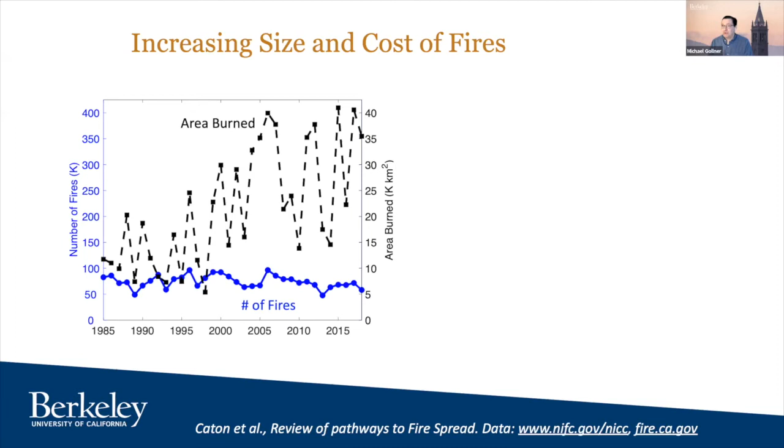The problem that you see is that the number of fires in blue is almost going down or staying steady. Yet at the same time, the area burned is going up. This is caused by 2–3% of the fires, which are blowing up dramatically in size. And that's where a lot of the destruction comes from, is that a small number of fires get very, very large, completely overwhelm resources. And sometimes they grow very quickly, especially at night, and that can cause major safety hazards.

And of course, the suppression costs are going up, but suppression costs are a small fraction compared to destruction and other health costs. California has a history of fire. I was a part of the original WIFIRE project through UCSD. On the left-hand side, you can see this is all the CAL FIRE collected data from 1878 to 2010. Lots of fires. A lot of the state is fire adapted.

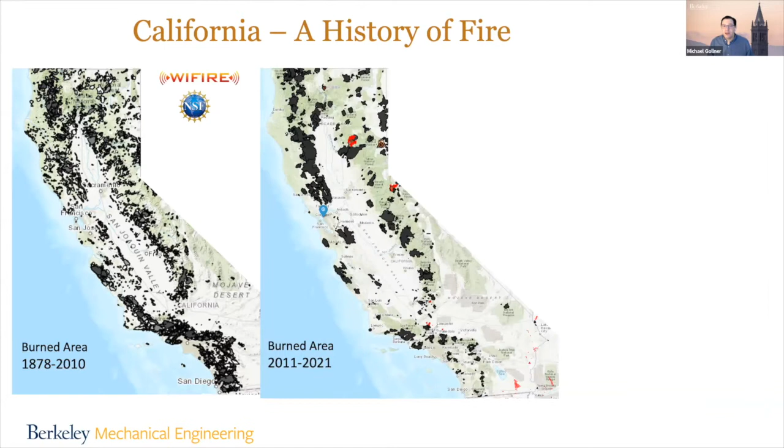It's always had fire. Between 2011 to 2021, if you just look at the scars, you can see something. It's not just so much about the area, but that a lot of those fires on average are much bigger. And it's shifted, where San Diego was sort of the center of things in the early 2000s. Now in the later 2011 to 2021, Northern California has had more and more of these very large fires. Southern California too, but Northern California especially.

And you can see a lot of the losses that have resulted. And it's really these WUI losses, which you can see here, which are just dramatic. The Camp Fire, the NorCal fires, which included the Tubbs, the Nuns, and the Atlas Fire, just the number of structures burned in fires. California is winning that race, unfortunately.

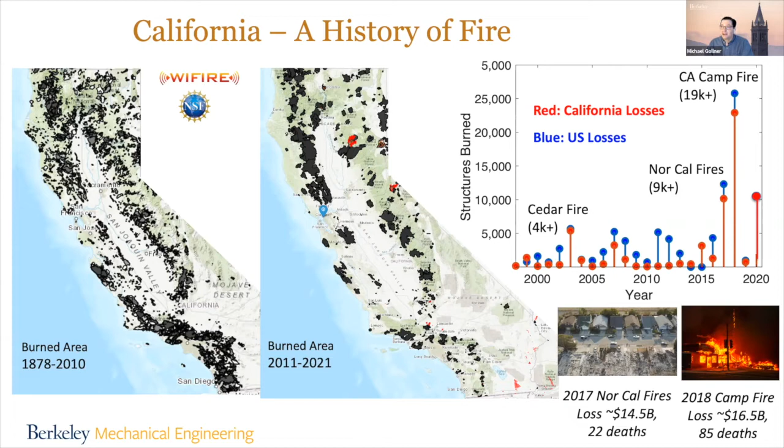This is a nationwide problem, but it's very much concentrated. We just have so much wildland-urban interface and so many people here in California that we're losing a lot of structures. And the costs are in the tens, 20s of billions for some of these fires, and the deaths, of course, most of which occur during evacuations. So it's a huge problem to tackle. And unfortunately, nothing's going to say it's getting better anytime soon.

I like to say that there's three main drivers of change here. The first being climate change, which we know changes weather patterns, and there's more drought, more extreme fire weather. Fire exclusion: we've taken fire off the landscape, so the only time fires burn is the worst case scenario. We've had a lot of suppression, we've removed indigenous fire, and we wait till the worst case scenario when we can't put out small fires. And finally, expanding wildland-urban interface.

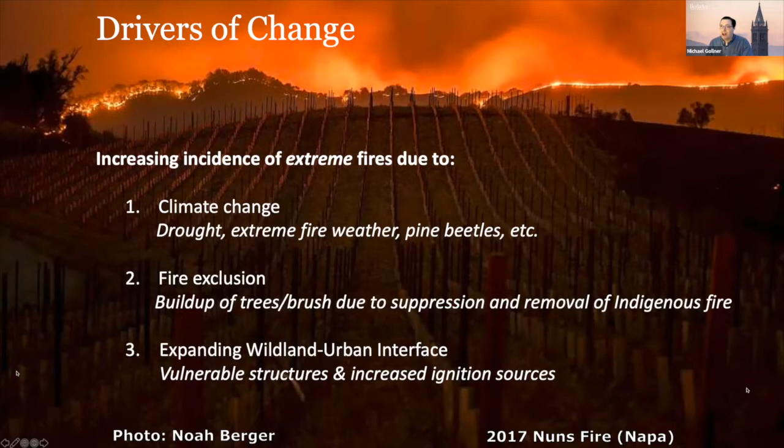A great example is the Tubbs fire. There was the Hanley fire in 1967 or something like that. It exposed some hundreds of homes, and there were only some tens that were lost. But by the Tubbs fire, there were tens of thousands of homes and over 8,000 lost in that fire. So there's that change in time. There's more people, more power lines, more things being affected, as well as ignition sources. So all of these combined together, climate change is probably one of the biggest, because there's just more high fire danger days to cause a problem.

So the talk today was focused on risk, and if we have to talk about risk, we have to talk about modeling. And modeling wildland fire is a challenge in and of itself. There's a couple things up here on the board. Topography, we've known, drives fires. Wind and weather drive fires. Of course, the fuels and the ecology.

But they all combine, and I think we're still struggling just to model fire behavior and to try to make it predictive. Because let's face it, we have trouble modeling weather as it is. Oh, it won't rain today, it rained. Or where's that hurricane track going to go? So we struggle with that side.

And then of course, fuels and ecology. Standard fire behavior models have 40 fuels. We know that there's more than just 40 different types of fuel, that the fuel changes dynamically. There's a lot of poor inputs that come in, not to mention the flame dynamics. We're not even modeling the real physics of the flames. And so all those simplifications combine to give us sometimes decent modeling, sometimes poor.

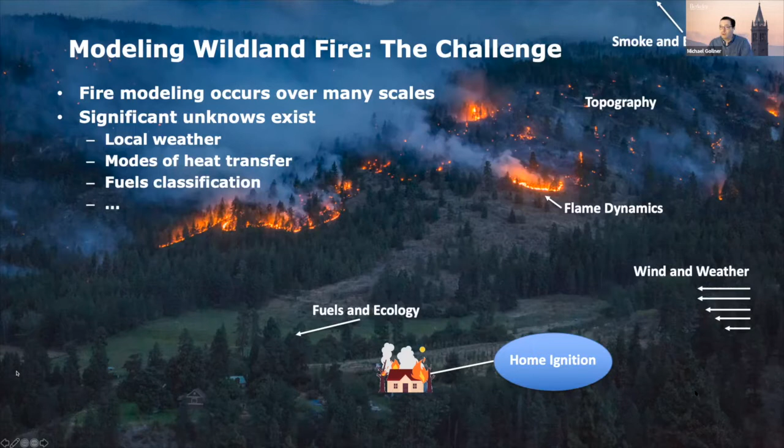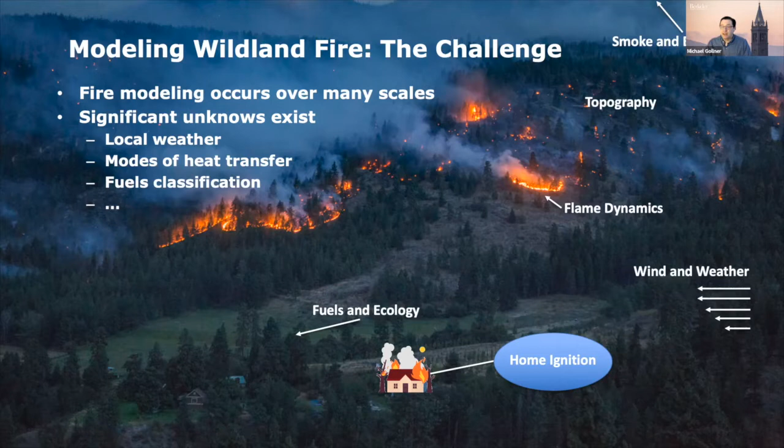It's pretty good to tell us that it's going to go faster upslope and faster with a faster wind speed, but there's still some issues there. And then let's complicate it. What happens when a home starts to ignite? And I'll tell you right now, there's no wildfire model that I'm aware of publicly that can actually move through the Wildland-Urban interface. There are some privately, and the way they do it are really varied, and they're all proprietary, but a lot is based on data, and it'd really be great to have this more open and to start to link these features.

So I want to start, before we move into modeling, why are our communities burning? I think that's been a big question. How could this fire possibly, this is Coffey Park, which is sort of the poster child example of a suburban community that was leveled following the Tubbs fire. That fire, by the way, jumped over a multi-lane freeway and a field before it got to this community.

Well, there's three ways we generally understand for fires to spread through the Wildland-Urban interface. First is radiation. And everyone thought that radiation was the big thing here, right? You have a separation distance, you have a height of flames. But if you actually calculate it, rarely is there a fire large enough to ignite a home from the main fire front. When you just look at the fuels, there are exceptions, and the Camp Fire may have been part of this, where you had very tall torching trees right next to houses. But usually there's a good amount of separation. And that's why we talk about defensible space. Move the fuel away from the structures, and you won't be able to get the radiative intensity needed. You need about 30 kilowatts per meter squared to ignite a panel of wood.

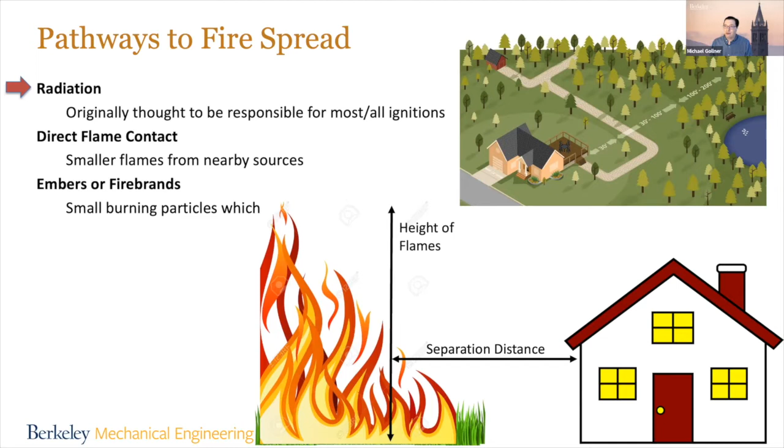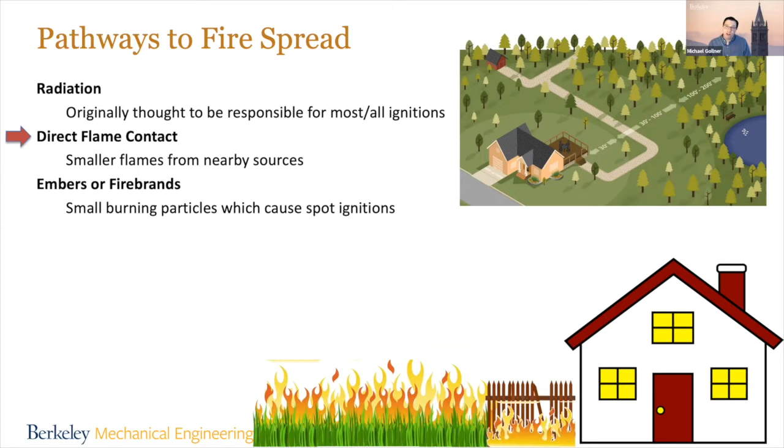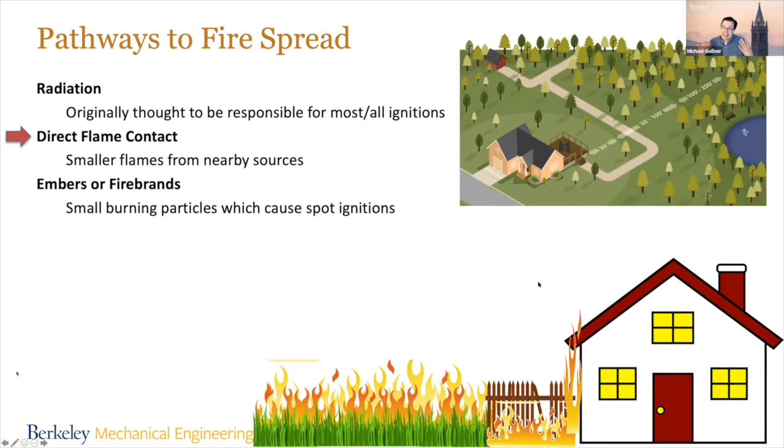Now, there's another way that fires can ignite, which is direct flame contact. And this happens often where a fire maybe moves through a field or grass or shrubs. Maybe it runs along a wooden fence post connected to a house and then ignites a fire. If you have a relatively small fire, but it is directly abutting a home and it's on the physical structure, it's hard for materials to withstand it, especially if you have enough fuel for it to last. So you put a wood pile right at the base of your home, and it gets into the eaves. There's little you can do about that, which is why we talk about the 0 to 5 foot zone, keeping flames and anything that can generate flames away from next to the home.

And then the real kicker is what actually causes most of the ignitions, embers or firebrands. And this is by far the biggest challenge to simulate. Small burning particles, which I've attempted to animate here, which land and then quite annoyingly will ignite a fire, not where you expect and not at the time you expect. It's a very complicated smoldering to flaming transition. And I'll talk a little bit about ignition from it.

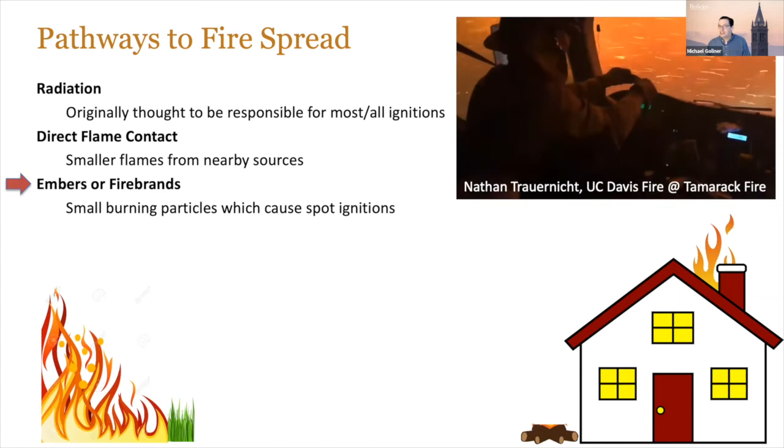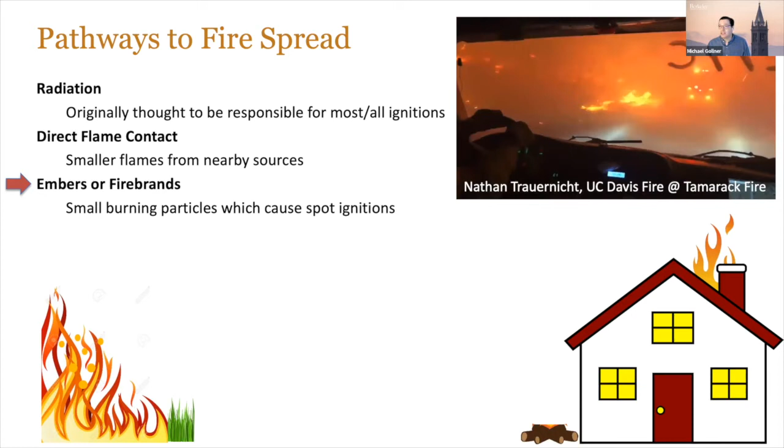But you almost think of it, Jack Cohen always describes it as a blizzard of embers. Maybe that's a little too cold, but you can see this is the UC Davis Fire Department at the Tamarack Fire. Winds are whipping up and embers are blowing everywhere. They can get transported kilometers ahead of the fire. Usually it's a large cluster of them closer to the fire.

But most homes at the Wildland-Urban interface ignite due to small flying embers, not the main fire. Investigations by NIST and IBHS and the UCANR have estimated somewhere between 50 to 80% of the ignitions occur due to embers or indirectly from igniting something in the yard, which ignites the home. And so you can see on the bottom right, it's a great example. The roof of the structure is on fire and nothing around it is really on fire.

It was not the main fire front. It was clearly an ember ignition on a roof that otherwise shouldn't have ignited. So how does it go from being a WUI fire to being a disaster? This is adapted from Calkin et al., and really it's from Jack Cohen's description.

What's that transition when we're igniting homes to making it level a community? Well, we have severe wildfire conditions, so high winds, dry fuels. These are key conditions for a fire to escape initial attack. So when we go to put out the fire, it doesn't work because it spreads too quickly. Generally, if flames are higher than the height of a 6-foot man, which is where these standards are based, we generally can't fight it by hand.

And if a fire is going to be larger than that, it's going to be very hard for us to put a stop to it any time soon. When you have high enough winds, you'll quickly reach that in 20 minutes or something, and then that fire is going to be too large even for aerial attack. Sometimes we can do a good job, but it's rare on those high fire danger days. It causes extreme fire behavior, which is large flames and high growth rates, and ignites residential fires.

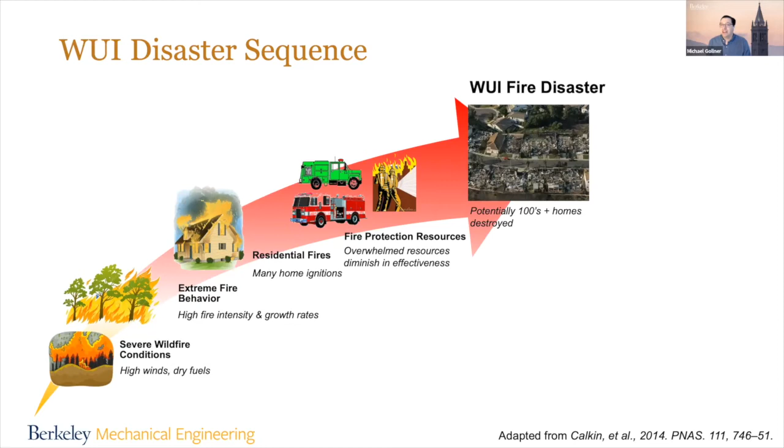NIST studies have shown if there is a fire truck parked at your house, that is the best protection, because there's a small fire and they're going to put the water on it. But embers mean that thousands and thousands of homes are exposed at the same time. And this fire may move like the Camp Fire moved, in a matter of an hour or two, and engulf a town. There simply is not time to move those resources. So we have to do mitigation in advance, or we're going to keep having hundreds or thousands of homes destroyed.

So how do we make a difference? Well, there's a couple ways. We can break this chain by reducing exposure. So instead of having extreme fire behavior, if we better design the community not to be adjacent to an area with extreme fire danger, if we do fuel reduction treatments around, if we do prescribed fires at regular intervals, all of these things can lower that intensity. We don't remove fire, we simply lower the potential intensity that is then going to be imparted on the town.

It's a little different than the earthquake field, where the earthquake's going to happen and we have no control over the jolt. Here, if we design the area around or we manage it properly, which can be its own legal hurdles, then we can actually reduce the exposure. We can't make it zero, but we can reduce it. The second, of course, is to harden our structures. We call hardening making them harder to ignite and harder to spread.

There's Chapter 7A of the California Building Code, NFPA or ICC codes. There are community programs like Firewise, which focus more on defensible space. All of these combined can help make it so that it's not that a structure is unignitable and unburnable, but it makes it less likely that they're going to ignite and burn. And finally, we can improve response. As much as I say we have to focus on mitigation before, preparing the response is still important.

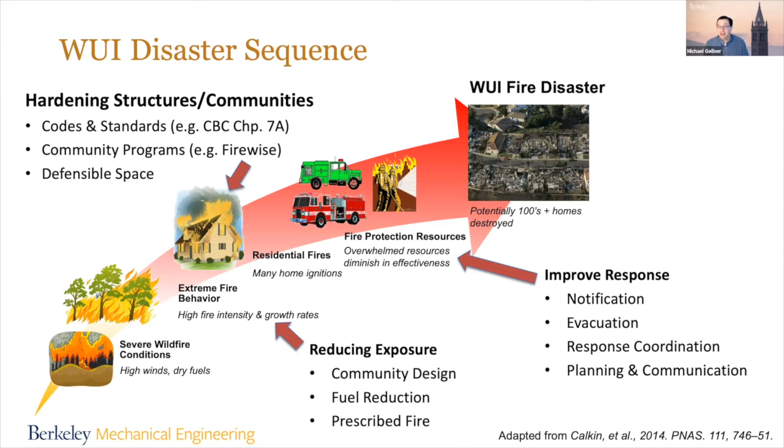So I'm going to focus on two things. I'll talk about the risk and modeling a little bit, but first I want to talk a little bit about experimentally: what happens when embers actually approach a building and ignite it? This isn't an experiment I did, but colleagues at IBHS, actually a former student there, runs a lot of their wildfire program.

And you can see ignition here of a decking piece in front of a pseudo home. They're lofting these embers and seeing how they accumulate and then ignite that decking piece. So we've taken that scale way down and have a very small laboratory scale apparatus. And why do we do this? Because those experiments are great, but we never actually see exactly how those little embers land on a material and actually ignite.

And so we've done 3 or 4 different studies, mostly funded by NIST, looking at how different types of embers accumulate and then ignite materials, and what kind of heat fluxes do they provide? How long does it take to ignite? That is key to us designing a proper protection scheme, and eventually we'll need to put this into our WUI models. I want to recognize Hamed and Raquel, the graduate students who worked on this.

Most of the experiments use the middle set. We wound up using the same material a lot of other studies have used, which is these wooden dowels you get if you're putting pins in your IKEA furniture. They're very repeatable, and they're great because they're fluted. They get a nice ignition profile and start smoldering. We did do some tests, and I'll talk about the difference between that and some real firebrand materials.

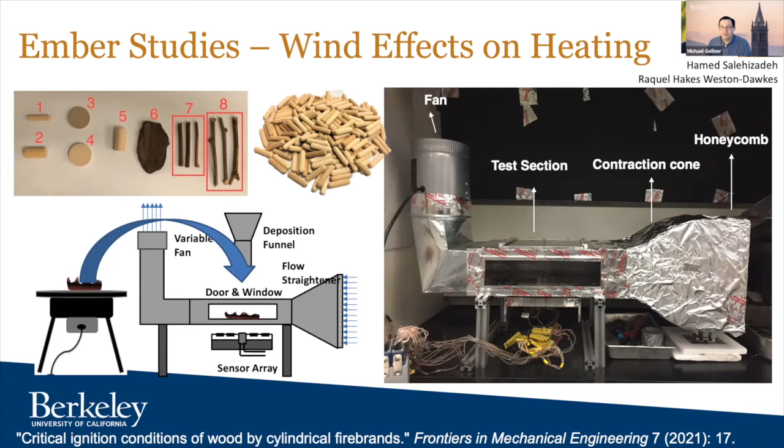The initial studies we did on embers looked at the heat flux we get from this. You can see examples of different smoldering embers. We chose not to use single embers because very few single embers can actually ignite a solid material. They'll ignite a bed of dried pine needles, but not a piece of wood. Instead, there's an accumulation. In a fire, in crevices and cracks, embers will fall and accumulate, just like leaves around a house, and those same areas are going to catch those embers.

Now, the leaves are their own problem if those are ignitable, but as you build up those embers, it's going to change the heating profile. So we chose a fixed amount of deposition of the embers, which you can see on the left, and looked at the heating. As one might expect, as we increase the wind speed, the heat flux goes up. It reaches about 40 kilowatts per meter squared in the center, which is plenty enough to ignite a piece of wood.

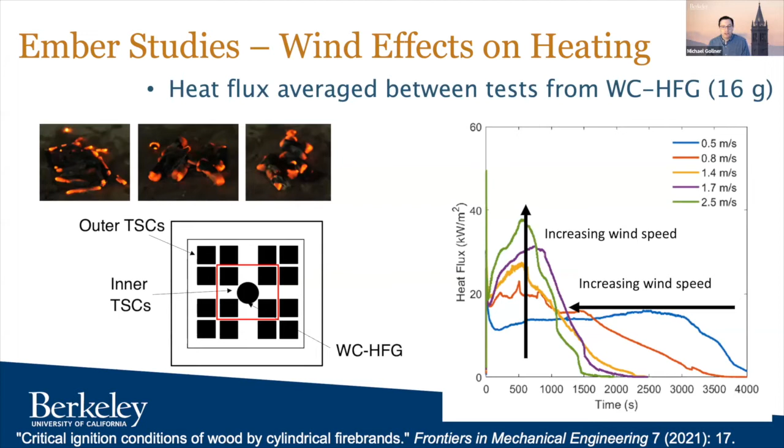The other interesting thing: the more you increase the wind, the shorter the duration of heating. So there's this balance, because as you increase wind speed, you increase the heating, just think of blowing on your coals, but you decrease the time that there's available energy to heat. This isn't a real fire where winds fluctuate and embers deposit at random; we did it all at once. But still, there's going to be a short window over which it tries to ignite a material, and it either works or fails.

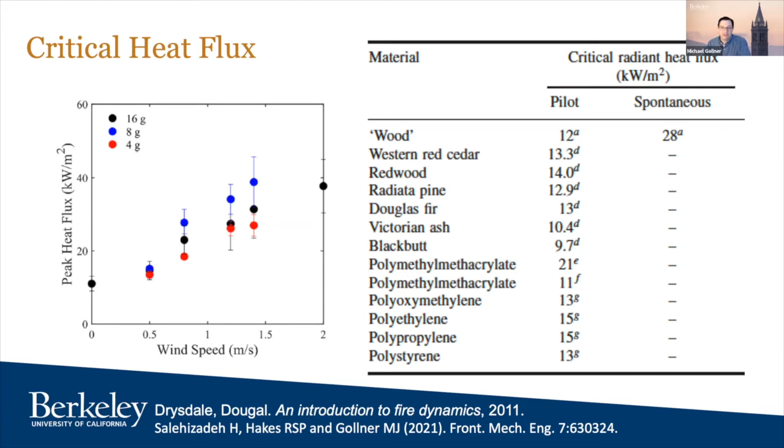Now, this may sound all wonderful, but the reality is changing materials on a home is really difficult. And we're not talking about the main structure and taking wood out from the inside, but even if you have stucco, if you have one exposed wood member on the eave, which is very common, you are now creating an entry point. And this could be an entry point where things accumulate and things can move in. So it only takes one crack, one opening where this can get in and actually cause a fire. So it's actually kind of a challenging problem.

Now, there were some questions after this. What happens with the firebrand material? So the bottom right, you can see we tried different sticks, we tried bark, we tried different shapes. Generally, there are some small differences, but at higher wind speeds, you start to see some small differences. They still generally are on the same order. The sticks produced something closer to the 40 kilowatts per meter squared that we were getting with the pins and dowels. Some of the pins and dowels were actually giving a little bit less in some of these because it was a different size.

But there is a size and shape effect. In this paper, we looked at some correlations with the way in which the pile deposits and how it starts to decay and the shapes. And there are some effects, but it generally is on the same order of what we were doing before. One of the biggest tells, of course, is what's the mass of ember load that's landed? What's the density of the material that it's landing on? Because that plays a huge role in the heat transfer. And finally, what's the wind speed that it's affected by? And we can expect in most of these experiments, this is a super low wind speed compared to what you might see in a wildfire.

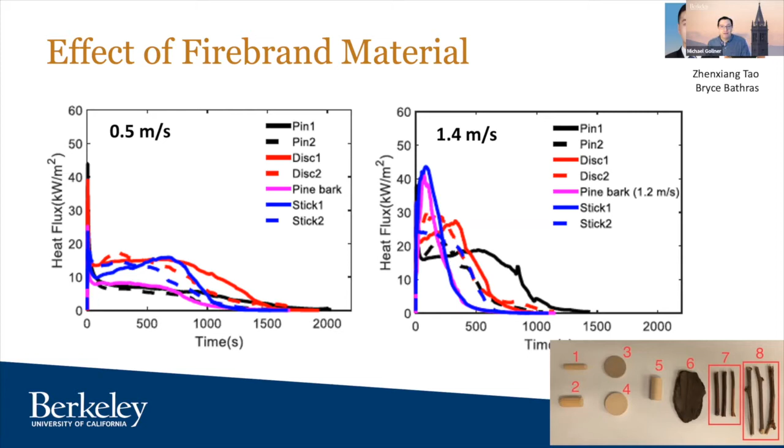We went back to that question as well of what's the difference between that single ember and that pile? And there's a lot of questions because everyone's focused on single ember experiments up until this point. And you can see the heating we got from single embers. This, by the way, is without wind. These spatial sensors didn't work so well with wind. When we did it without wind, you can look, instantaneous average peak heating, the heating from a single ember is incredibly low in comparison to what we get from a pile. And so we can surmise that a single ember is probably heating the material by contact. And yes, if you had a small pine needle that was directly touching something smoldering, we can move the smoldering front and eventually transition to flaming.

However, in the bottom, once we have a pile, 10 grams of embers that are smoldering deposited on top, we can't very well rely on this single ember assumption. We're actually getting heat fluxes with peaks on the order of 28 kilowatts per meter squared, on average 10 to 12 in the center here. It is spatially distributed and it's much higher. I think a lot of this has to do with re-radiation within the pile. It's something that hasn't been fully sorted. It's very hard to put sensors in something that is reacting and glowing and degrading your sensor and heating and cooling your sensor at the same time you're trying to measure. And so that's still something we're trying to do, is to tease out the different mechanisms.

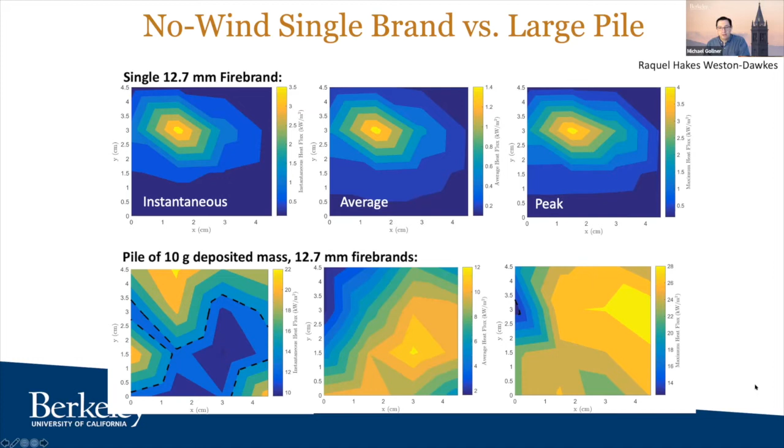The final measurement that we wanted to show here is related to ignition and heat flux in a crevice. All of the previous results were on a flat piece of wood, but I think many of us know that most of the ignitions in a wildfire aren't occurring on a flat piece. They're occurring in crevices, in decking boards, in little nooks and crannies in our wood roofs.

So what we've done is look at pressure treated wood and redwood, two common materials used in decking. We use a standard spacing used for decking, on the order of a centimeter. And we looked at these igniting with different wind speeds and at different angles with the wind. What happens if the wind is blowing right through the crevice at 0 degrees versus across and over?

We did all these experiments not only on the wood, but also with a sensor suite to try to look at the heat fluxes, and then we can compare that to the flat data we have. I don't think we can get too much from the wood. Basically, whether it's pressure treated or redwood, if you crank the heating up high enough, you will smolder and eventually transition to flaming. Redwood is generally considered a fairly fire resistant material, but if you give enough embers and enough wind, it definitely will ignite.

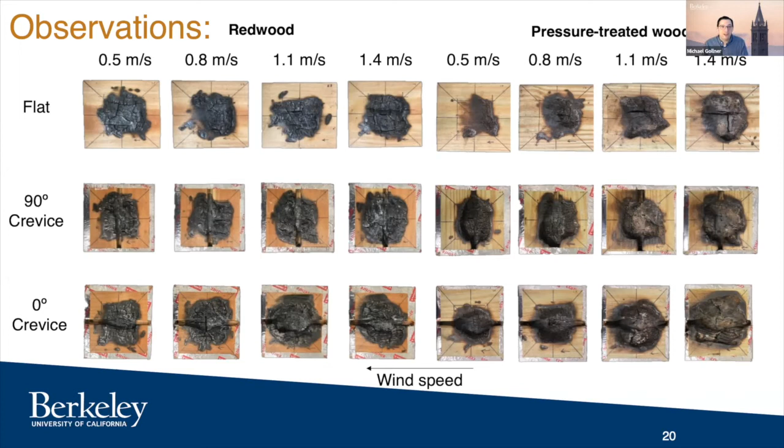Ignition in the crevice, though, is a lot more than that. It was really fascinating to see when we tried to measure the heat fluxes inside that crevice. On the left, 0 degrees means that the wind is flowing straight through the crevice and aligned with it. On the top right, I'll show you one that's about 30 degrees, at an angle to show the biggest difference. And on the bottom right, this is flat with no crevice.

With no crevice, at the particular conditions we did, we only moved up to 1.4 meters per second. We didn't go to the higher wind speeds that we did in earlier studies, and I'll talk about why in a moment. It only reached about 20 kilowatts per meter squared. Well, at 30 degrees, we're getting near 40 kilowatts per meter squared, which is a substantial jump in heating.

However, if we align the wind directly with the crevice, which probably isn't the most common wind situation, we get a dramatic jump to the point that at 1.1 meters per second, we're getting 75 kilowatts per meter squared of heating, which can burst into flaming rather than just starting a smoldering process. So we see a really dramatic shift in a crevice, and it makes sense. The crevice or any of these nooks not only capture the burning material, but also aid in re-radiating the heat and causing it to heat the material more.

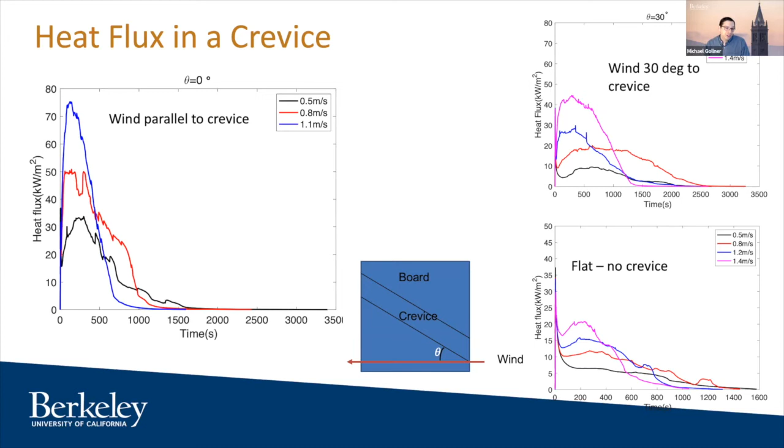With a change in the geometry, we can get 3 times the values and really blow all of our assumptions. So there really is something to looking at how we can try to prevent ignition in crevices and change some of our designs to try to prevent that.

What happens when we have the flames moving is that we have a wildfire model that stops right where this fire did during the Cedar fire. The fire didn't stop there, but at this image, that's where our models end. Once we no longer have vegetative fuel, we can't model into the urban community.

When we think about risk in the community, if anyone's familiar working with wildfire, everyone loves triangles. And so we're going to see a wildfire risk triangle, which has to do with likelihood, intensity, and susceptibility. And the current wildfire hazard and risk analysis considers a landscape scale. We're talking about 30-meter to several kilometer size grids. I mean, the risk analysis was developed for a nationwide analysis of wildfire risk. It was not developed with a community in mind.

And so the work on community risk doesn't really include exposure conditions. And that's something that we've been missing and looking for. So on the bottom, you see there's likelihood, intensity, susceptibility. When we go to community scale, I think the susceptibility is going to be important because we have to understand the exposure conditions. So long-term, we want to develop a WUI spread model, whether that comes out of the earthquake engineering literature, which I know Negar has been working on and others, or something data-driven, or something physically based that's new.

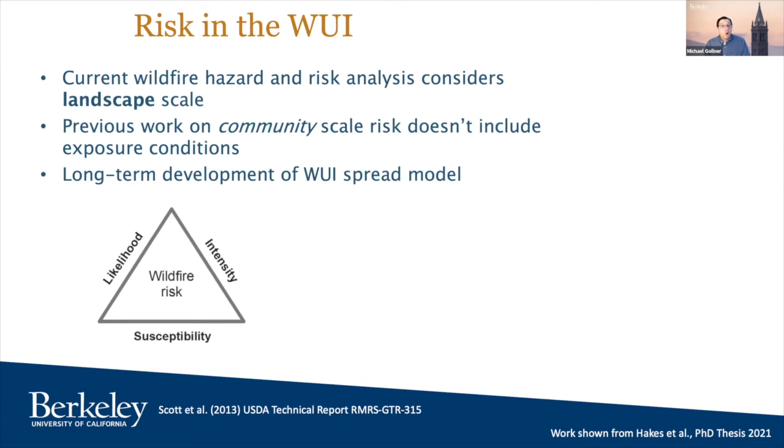So when we're looking at risk in the WUI, we have hazard, the probability of a given exposure level being achieved. And so this comes a lot from previous weather data. What are the likely conditions? As well as for hazard, it's going to be the actual wildfire conditions that can be reached at those conditions, so the fuel models, and the vulnerability. And I'll tell you right now, the problem is vulnerability. What vulnerability do we have for homes? We have very little, if any, susceptibility data of a structure to a given exposure level.

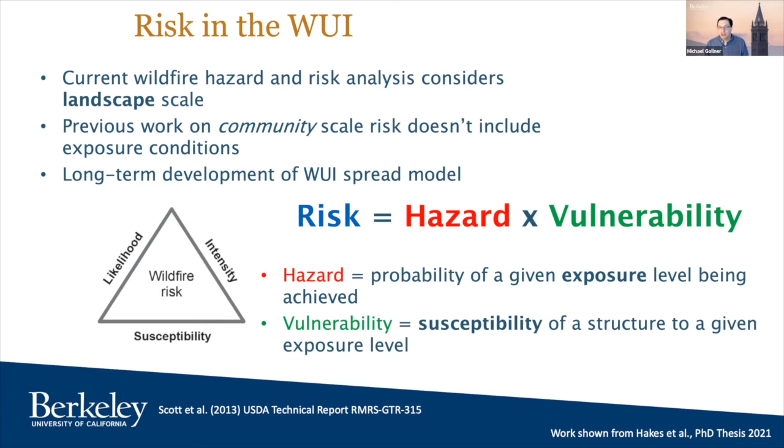So this was the beginning of a project that I'm going to show. It was led by a PhD student, Raquel Hakes. She's now a postdoc at Sandia. She worked in her thesis on a reconstruction model methodology. So we have a great database of structures that have burned in fires. And folks have published papers, Alex Syphard and others, and Jon Keeley, that have looked at, okay, structure burned, what were the fuels nearby, what were the weather conditions? But I'm really interested not just in that, but what was the actual exposure of the fire to that structure prior to it burning, as well as what were the conditions? And no one is there collecting that data.

So we want to fill it in by trying to run those wildfire models of those past fires, match them as best we can, and then pull out things like the flame lengths, the rate of spread, the fireline intensity, and of course, embers. And that's probably one of the hardest parts. So that's the goal of what we've been doing, to try to recreate fires, take the loss data that's been collected by CAL FIRE over the years of all the structures that have burned, fill that in with the structures that didn't burn, which they weren't collecting, and then do an analysis and see what factors are actually important, and can we look at this in a data-driven sense of modeling fire spread in the future.

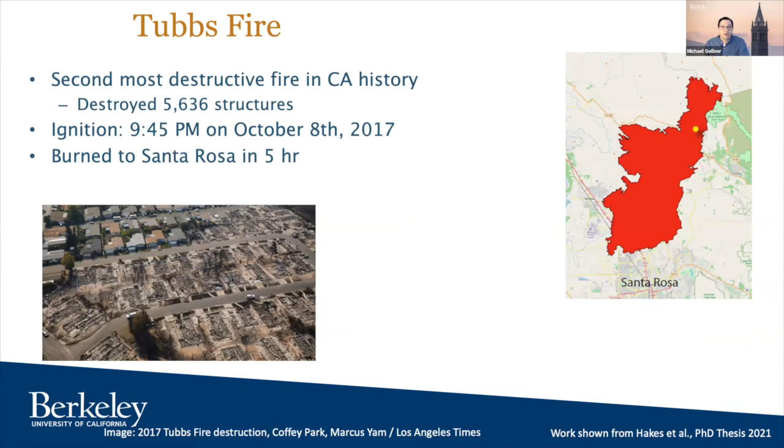So this is the Tubbs fire. It was the second most destructive fire in California history. It's maybe dropped down the list a little bit, but it destroyed 5,600 structures. There are more outbuildings as well. The Nuns and the Atlas fire were also going on during this time, but you can see how it burned through the Coffey Park community and really went through suburban, but it also started up in the hills and went through a rural community. So it's a nice fire. It was very fast. In 5 hours, it burned to Santa Rosa. Unfortunately, we have very little information about the fire as it went, but we know the final fire lines and we know everything it destroyed. And it destroyed both rural and suburban, so that gives us a nice starting point.

So for the validation, we ran these models in a model called ELMFIRE. It's very similar to FARSITE, which is the current landscape scale model of choice by the Forest Service. ELMFIRE uses the same Rothermel type, which is a 1D correlation for flame spread that FARSITE and FlamMap and every other US model uses. The difference really is the way it was developed by Chris Lautenberger, who's now at Reax Engineering. He's a Berkeley alum, and basically it treats every fire run probabilistically from the beginning in a level set context. This helps us in the analysis and in terms of developing everything for risk. It also has a better treatment of embers.

It intrinsically has a probabilistic treatment of embers. If you ever dig into FARSITE, FARSITE only lofts a single ember from a cell to another single cell. That's all it can do. And so it's a little bit limited, and it only does maximum lofting. It doesn't do in between. And so that's why we chose to switch to ELMFIRE: it just treated things better when we were looking probabilistically, and it already had some of these ember models and the links to WRF and other models we needed built in.

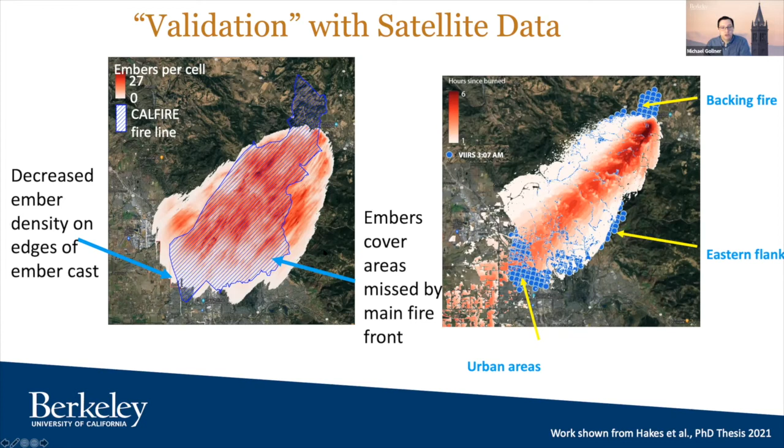And what you can see is that the embers were cast far beyond this fire, and this is probably a relatively realistic ember cast. So there's more embers cast in the center of the fire, but it does move into the urban area. And there's only a small area of the urban that isn't covered with embers, and that's probably because it was a totally suburban fire and it was spreading relatively slow until the winds died down.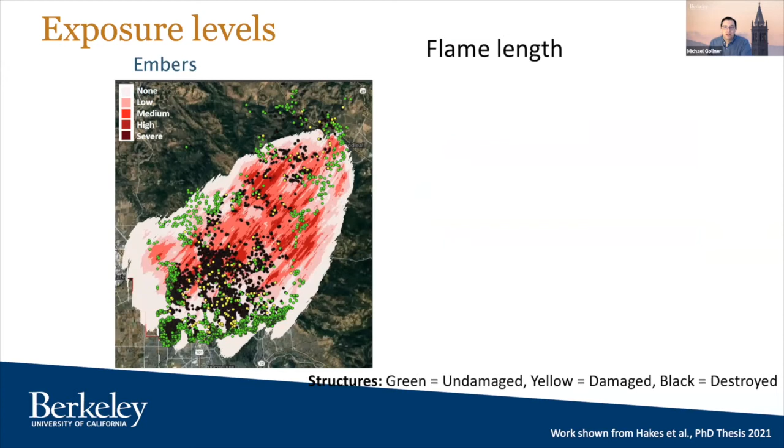So what we try to do now is to link that with the exposure level. So we have both embers and flame length, and on top you can see the fires. We have green undamaged structures, yellow damaged structures, and black destroyed structures. There are very few damaged structures, just the way that they collect it and just the way fires behave.

If there's nobody there and an ember gets in, it might take 10 hours to burn, but that house will burn to the ground. Houses are designed to have a fire crew come and put out the fire. And during an event like this, there's just no one to do that. So only about 10% are damaged. Most of them are completely destroyed or they're unharmed.

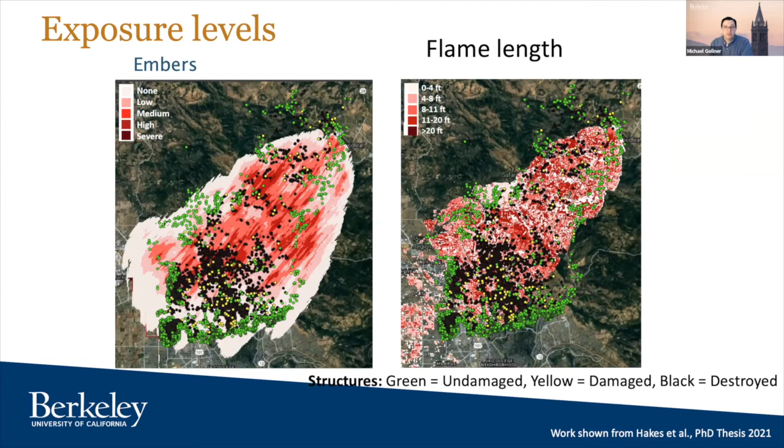So looking at the exposure levels, I mentioned what happens in that urban area, and Coffey Park was sort of the poster child. The flames don't reliably expose the urban areas, and you can see the flame lengths here, but it is actually included in the ember cast. And so most of this area receives, it's actually interesting, a very low level of ember cast. So there's definitely embers that are lofting.

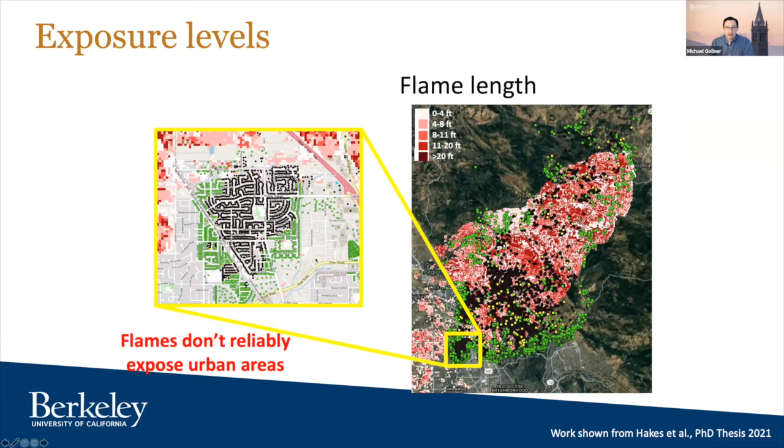Remember, the ember model depends on the distance from the source, the intensity of the fire that's generating, as well as the wind speed and direction. And so it's lofting those embers in this area, but it's at a lower density. But it doesn't take a big density of embers to ignite a fire. So once that fire gets going, it then became an urban conflagration and spread through the area. And we sort of missed some of the ember exposure further down to the left.

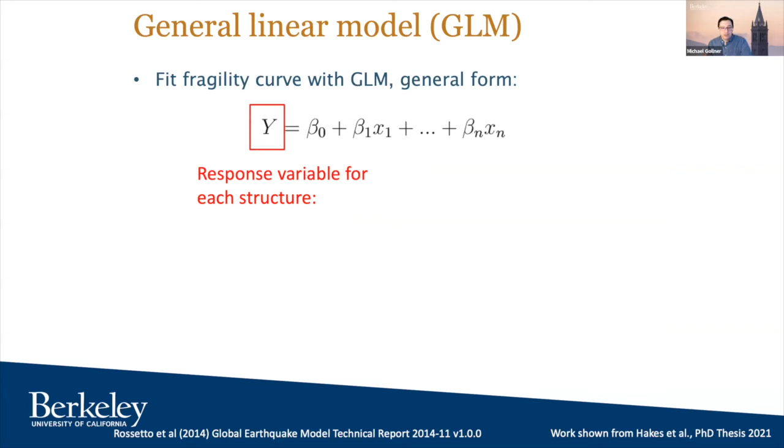So what we try to do is take this sort of fragility curve approach as a first take. So we're fitting the fragility curve with a general model, and we find a response variable for each structure, basically the damage state. So we took basically everything that's undamaged, damaged, or destroyed and go between 0 and 1. We didn't really look at the damaged because damaged structures were so few, and so we just sort of lumped them within destroyed. And that seemed to work better and to simplify the analysis a bit. And it was a small number of structures in comparison to everything else going on.

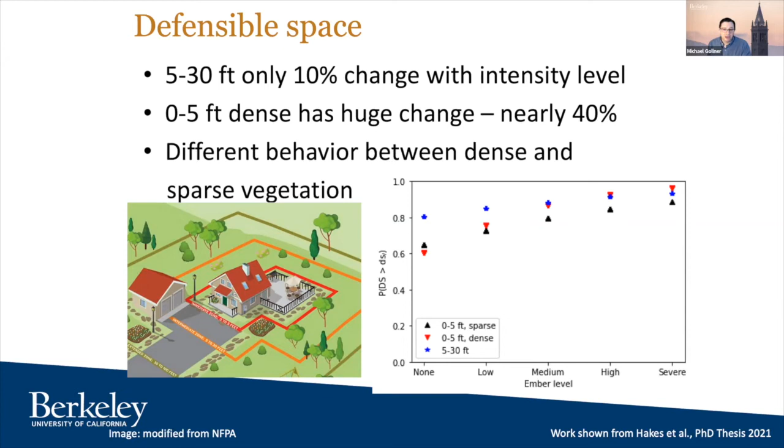You know, just to highlight, it's not just suburban communities. In this case, this is a rural community and the entire lifeblood of the town is gone, much like Paradise was. Although here, reporters were actually in the town while it burned. And so there's really a key need for us to take these communities and make them more resilient to fire.

So I think key takeaways when I'm speaking with engineers is to remember wildfire is a natural ecological process and we're disrupting it. And our goal is not to remove fire, but reduce risk and to make it so that our communities are going to survive. We can lose a few houses, but we don't want to lose lives and we don't want an entire community to burn.

We want to make the community resilient so that a few houses burning isn't going to take down the entire community, which in many cases under extreme fire conditions is the case right now. So as engineers, we're trying to create models and optimize and prioritize decisions. We need quantitative experimentation and understanding of the process.

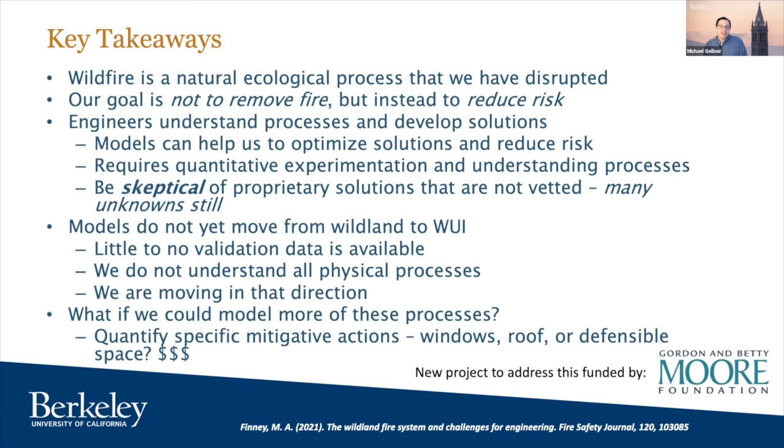This was a question actually from the state legislature: how many homes in the community do you have to protect till it provides sterilizing immunity for that community, which is clearly a pandemic term they're learning about, sterilizing immunity. And I don't think anyone knows. And I think it definitely depends on the exposure. And so it's all sort of a mixed thing.

Now, if you know Charlie Scawthorn, who's up here at Berkeley, he's big in the earthquake field and he has lots of opinions. We want to move to a physical modeling approach, but initial attempts at trying earthquake models with fires have been difficult. And I'd love to hear Negar's opinions because she has a recent paper on this. But building something from scratch, there's a lot of aspects that go into this.

And at least in my expertise in the firebrand models, we don't even have a lot of the numbers to do this accurately. And so I think there's still going to be a lot of data-driven pieces that need to come in to make it work before we can move to a fully physical approach, because we still have a lot of unknowns even in the physical processes.

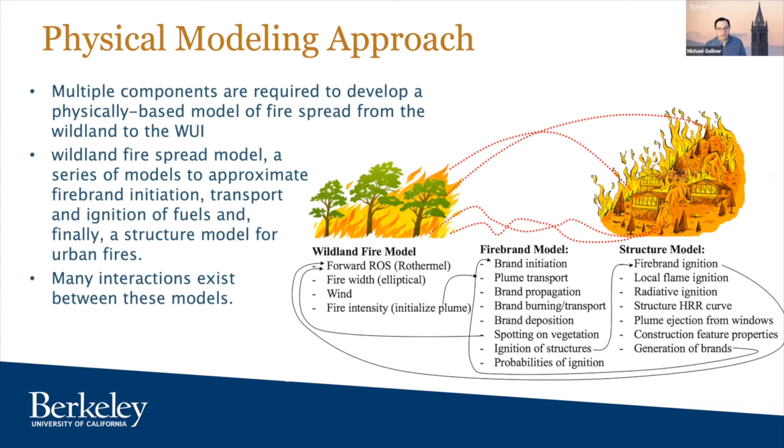And so I hope out of this you get that embers can deliver the ignition heat fluxes. It seems totally obvious to me, but there were some questions in the community maybe 5-10 years ago when we started, and that we have to look beyond a single ember to clumpings of embers. And hopefully we can start to develop this relationship between exposure and destruction. And practically, embers and flame length are going to behave differently for risk.

And we only need a few embers in practicality to take down a community if the conditions are right. And so we really do need to look at how that exposure changes, and hopefully we'll have some field data to start to link some of these pieces in the future. So that's all I have, and I'd love to take questions and comments and any discussion from the group.

Great. Thank you, Michael. So let's hear it from the audience. Any questions? Okay, someone raised a hand. Pega. Thank you so much. Thank you for the presentation.

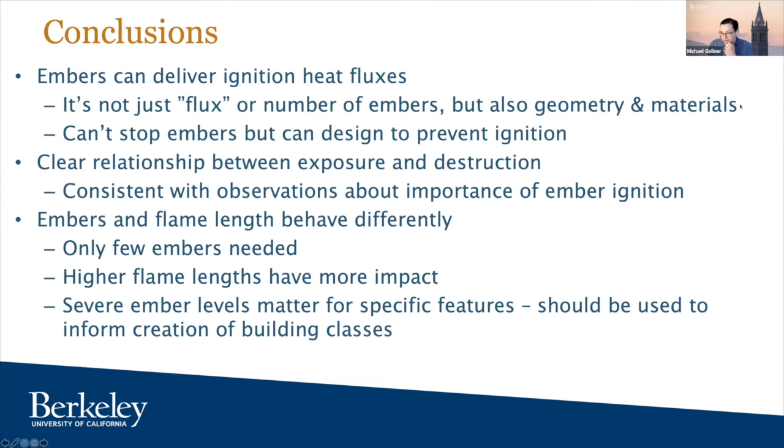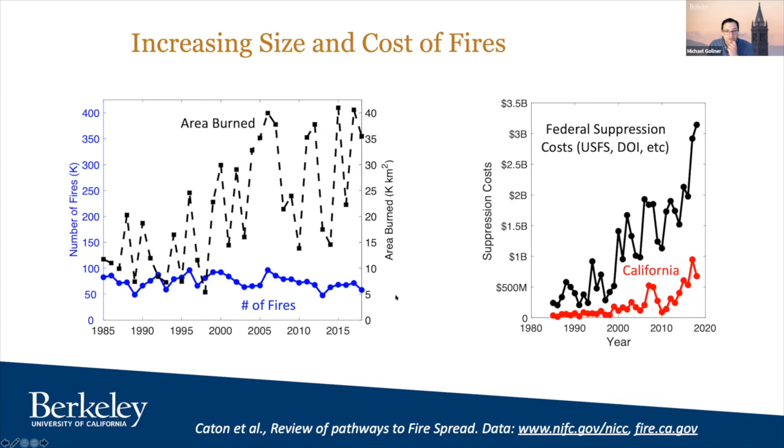I actually have a question related to one of the slides that you showed at the start of the presentation, in terms of burnt area between 2011 to 2021 compared to before. And you show the trend of reduction of wildfire in the south of California, and it goes higher in the north. So I'm wondering what are the factors that cause these changes and the reduction in the south part.

Yeah, it's a great question. I'm not the weather and fuels expert, but from what I've learned from them, in terms of the way that we respond, SDG&E, when I was still in grad school back in the day, was acutely aware of this issue. They started upgrading lines. They started their own power shutoff program early. San Diego County has still made some mistakes, but they did significant work in reducing fire risk. So I think Southern California had an earlier hint and started to work on reducing risk a little bit earlier. There are still issues. Some of it has just been that Northern California has been very unlucky.

We had those lightning fires, which ignited fires in areas that haven't had fires in 50, 100 years. We've had a lot of Diablo wind events, a lot of those foehn winds, and Southern California hasn't had as many. So there's some climatic regions, and I think especially further south towards San Diego, where we had the Cedar Fire and the later fires from that, you could see the firestorms that came later. The destruction wasn't at the same level despite high fire danger conditions. So I do think they learned a bit from it.

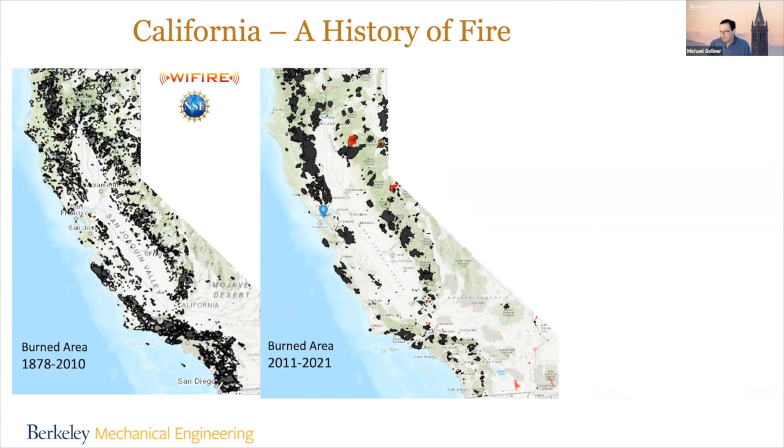I was wondering if you might comment on expanding this idea of the challenge of having multiple embers and orientation of the decking material, for example, and how that increases the severity of the damage, and scale that up to a community, because depending upon how you have orientation of buildings and orientation of streets and distances, perhaps there could be some factor there in the probability of more of a wide scale destruction in the community. So I would be interested in your thoughts on the extent to which that might need to be looked at as we look at the WUI disaster potential.

Thanks. Right. Okay. Well, I would say in the crevices, I think what we're looking at probably has most application to test and small scale design standards. So we're not going to change the orientation. Who knows how the wind's going to come? Because the wind, we may know where it's going to come, but it's going to flow around the house. It's going to do things. That's not going to factor into the design of a deck. What we can say is that inside that crevice is really hot and a key area for ignition. So there should be no way for things to catch in there.

Does that mean that we need to add a coating on the sides of the beams? Will that coating last for 10 to 15 years after foot traffic? That needs to be done. Can we put a piece of metal flashing on the underbars? Will that be enough to prevent ignition to spread? We know the flames can spread and smolder through. There may be a simple enough solution for certain designs that we could put flashing in certain places and it would prevent embers. I mean, you might get a small fire, but it wouldn't be able to propagate to the house. And so it's those kinds of small solutions which might be a compromise enough. Now, it's pretty hard to put that in after you install the deck, but it works for new decks.

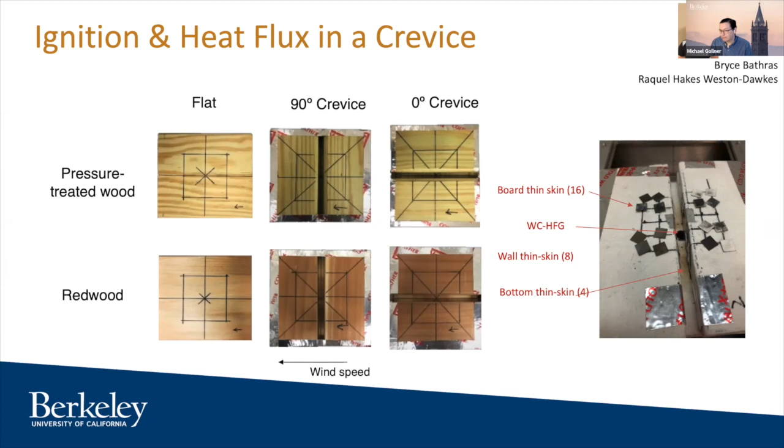And then my follow-up question is, so the plots you have where even if you have the none category for the severity of the spotting or brands, you still have a probability for damage, right? It starts with 0.4, 0.5. You mentioned that it doesn't start from 0. I wonder, I could be totally wrong, but right now the spotting and the ember level coming from the simulation is capturing ember level only in the wildland, right?

But now we move into the community and you have houses on fire, they also generate embers, as well as become fuel themselves, which could end up in the none category actually, because you have embers coming from a different source.

Right. Yeah, so there's two sides, so we're skipping the structure to structure component, and we have found, and I don't have updated plots, but it probably goes more to 10 or 20%. It really changes the left hand. When we get a better capture, there are other structures that weren't exposed that are not part of any of the databases. And as we've manually started to enter them, the data hasn't changed in any of the results, but we've been better at moving that bottom probability down because we're getting more structures that don't have exposure. So that is helping.

One of the things going on is that eventually we'd love to use this so that we can do it with current wildfire models and base it on what we have. And so, I think one of the keys basically is that embers are just so important here. The urban fire spread is important too, but I almost think that getting the ember model right and coupling that to the risk might be just as or even more important in how it's driven.

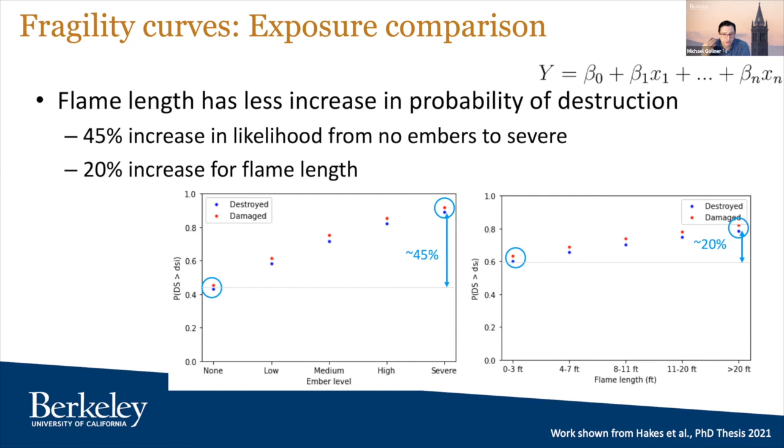Yeah. And that's interesting about getting decks from homes being remodeled. Yeah, it's something we can do. In fact, right now we're just sort of doing a volunteer study with Marin County Fire. They're looking at mulch. California is really moving in that 0 to 5 foot zone, trying to figure out how to prevent... there'll probably be some regulation about preventing materials being in that zone. And so Steve is part of that, and is kind of helping organize that.

And we're probably going to have a bunch of mulch out for 6 months in Marin County, getting it aged as much as we can, and then run it back to the lab and test it, as well as doing some field testing. But even getting a spot that won't be messed with for 6 months is hard.